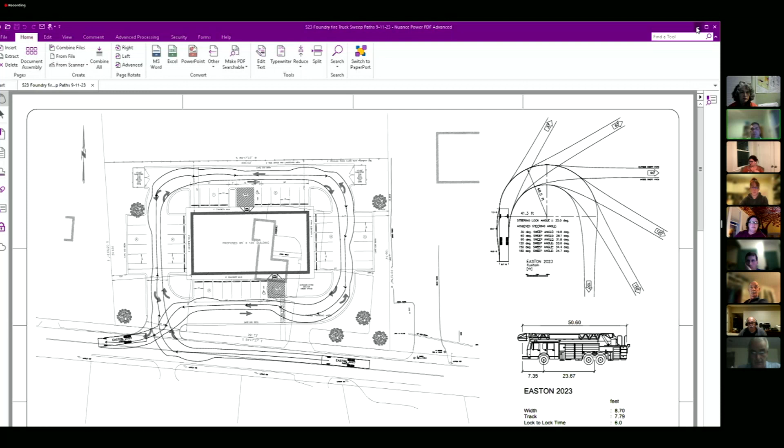Yes, let me... you want me to put... can you see that screen? Yes, you can. Okay, so I highlighted where the structures are for the stormwater, just so you get an idea of their location. They were there with a dotted line, but I wanted to make sure you could see them easily.

The other thing up front here in these parking spaces is that the ADA requires the handicap spaces be as close to the front door of the building as possible. So that's right up here up front. We may even have to put a second one on the other side.

We also have the fire lane in the front. So if we were to somehow move this building forward and eliminate this area in the front and make it all green space, we would really be eliminating the access to the front for the fire department coming around, and also the handicap spaces. It just didn't seem to work no matter what.

We tried all different methods of trying to accommodate the requests or the suggestions, and we just couldn't get it to work. Yeah, in a way I can understand how maximizing the building space on the smaller lot can limit your options as far as the layout is concerned.

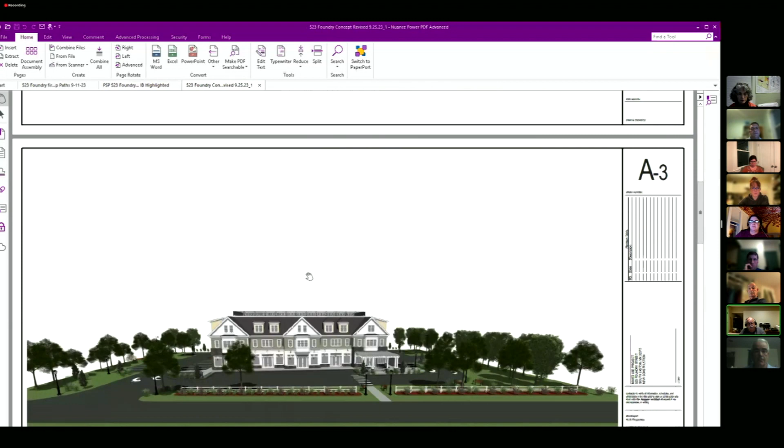I've added bushes in the front, bushes around each island, and bushes in the back on the back corners, instead of having the cement structures there.

We do have a pergola in the front, and we have tables on the other side for people to sit out there. If we were to somehow move this building forward, that would move forward as well, and again, it wouldn't work. So we did try several different ways to accommodate this.

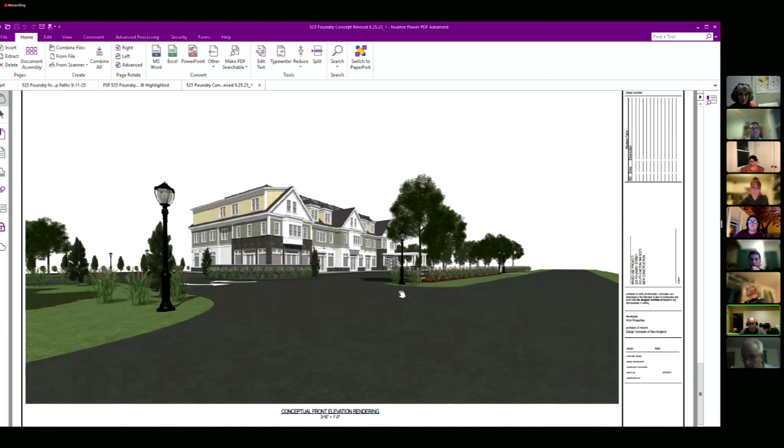And we do have 30% or more of green space, and all the similar projects I looked at in town are all around 20%. I know it's a different district, but I'm trying to show you with these renderings the amount of green space we have there. I think it's quite a bit compared to what other people put in, and I'd be willing to put more bushes in if that made it better.

Are these renderings a somewhat close example of what you're going to suggest for the application? These building renderings are exactly based on the site plan, and these renderings are what I'm looking at for the landscaping. I don't know if the trees out front are the best idea or not.

I'm not sure if it is or isn't, but I know the trees on the side and the other sides are no problem. Maybe those trees do stay out front, I don't know. I don't know what the board's opinion of that is — it kind of blocks the building at the same time.

Maybe if we can just go back a little bit, because we have some new members here, and it's the first public hearing on some of the preliminary information you provided before. Can you give us a quick summary of the actual project itself, as far as the residential and commercial component?

Okay, do you want me to have Walter do that, or— Yeah, sure. Walter Hermano? Are you there? Walter? Okay, maybe not. Okay, so what was the question again? I'll see if I can.

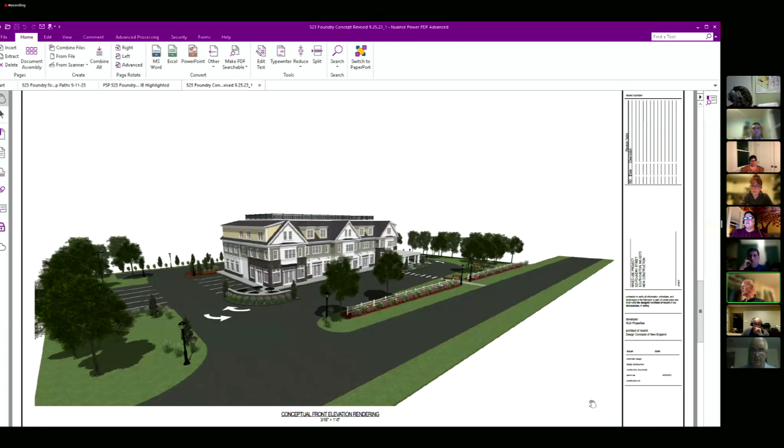It would be a shame to build that nice white fence and then have to move it back because of the sidewalk. Well, if this will be a walkable neighborhood with everything else, and there is a sidewalk there, I would like to see benches and things like that by the sidewalk, so people going to the businesses, especially the bakery, can sit down and have a drink. That changes the way to look at it, but maybe it's too early to figure out. They have a fence there, that's what they have.

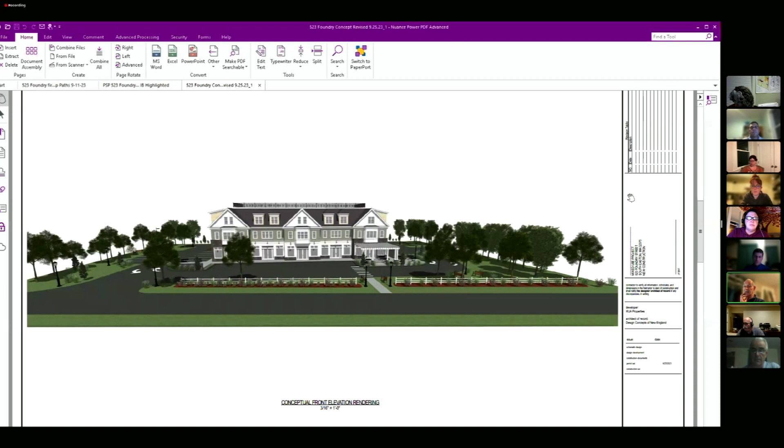Right, and the space between the street - I had a sidewalk on there before and we pulled it off. There was enough room to put a standard sidewalk in there and still have the bushes there and the fence. They don't have to be exactly in that spot, they can be pushed in a couple of feet if needed. There's plenty of room there. I would say take that into consideration when you put the fence - you don't want to start pulling the fence off because they are laying out a sidewalk there.

Given that the 25% plans for the Foundry Street reconstruction are either ready - I think they're done - that should be something we could look into and help you find out. I believe they're still in the pre-25% phase, but I will talk to DPW.

Mr. Adams, excuse me, how many parking spaces are on this plan overall? I believe, let me pull it up. It's in your zoning table? I have it right on the plan. Let me check - so the parking spaces, the required parking spaces are 37 and we have 42.

Okay, how many out front are you planning? I believe there's 8. It says restaurant requires 13, retail 10, multifamily 14, handicap 2 places, total 37. You have 16 for the front, I guess. You count some on the side for them? I have on the sides, I think 12 on each side. Retail says 12, restaurant says 16. I don't know how you count the 16. That's my question.

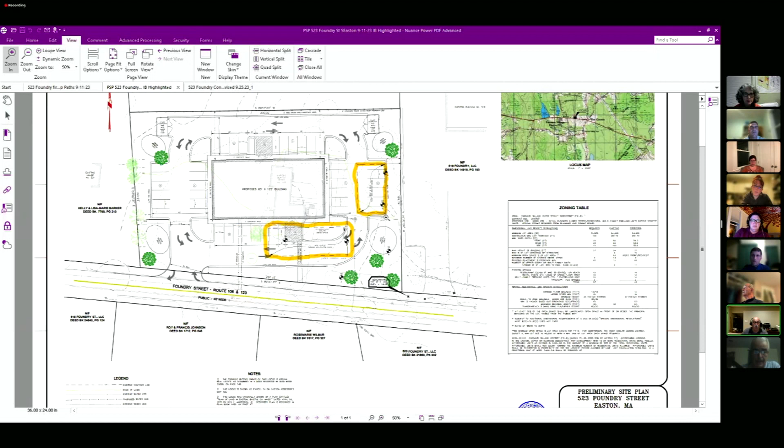It's probably adding on the side 8, 4. Yeah, there's 12 on each side. Let me go back to that zoning chart. Restaurants. So I don't know - Walter, can you hear us? Stephanie, do you see Walter? Walter had indicated in the chat that he's having a problem with his audio. Okay, so I'm also - I don't know where we got the 16 parking spaces.

I count 8 on the front. And I don't know if they include what they call the handicap, so it's probably 7, unless it's a double count. Do you understand? Those numbers don't match. So I don't know if the 8 that's here in the front includes the handicap, right? But in the table, the handicaps are counted separately. Okay, well that should be easy enough to clear up.

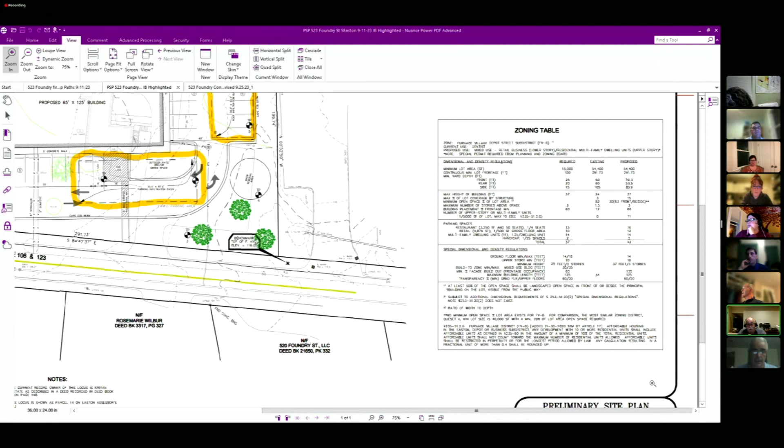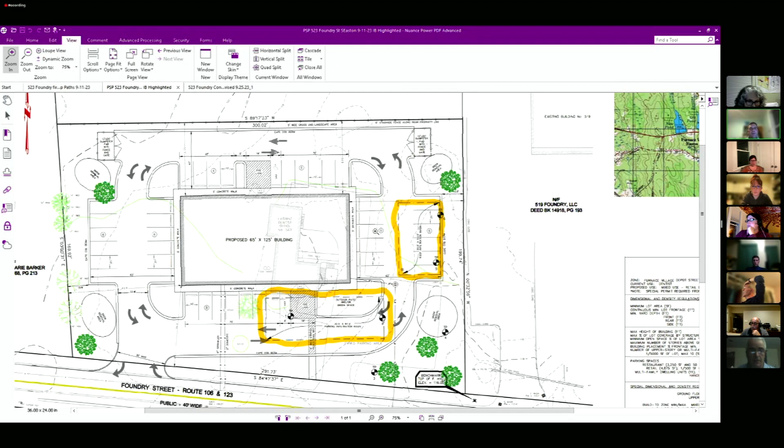Yeah, we can revisit that for sure. Good catch though. So we can count the total, and it comes to 42. I will assume, though I haven't done that, that some of these 8s for the restaurant are on the sides. Yeah, I don't think any of these are earmarked for different uses - it might just be logical that the front ones would be for the commercial, and the side ones would be a mix of residential. They could have some signage trying to direct people to the right spot, but usually when you share parking between uses, it's just a balancing act between the busy hours of both. I think the way you put it on the table is incorrect, although when I count the total on the plan, not the table, it's 42 places. So the total is correct, the way it's represented is wrong.

I'm sorry, Peter, Amos, what is wrong? Because I counted the number of spaces indicated in the circles, and that adds up to 42. Okay, are the circles wrong? No, they're not. You have on your table indicated that there are 42 parking spaces.

That is correct, but if you look at the table, they have descriptions that don't exactly match. They have 8 for the restaurant and some additional ones. Oh right, I see the table is a key, the circle number is saying what those parking spots, those parking areas are for. I see, right.

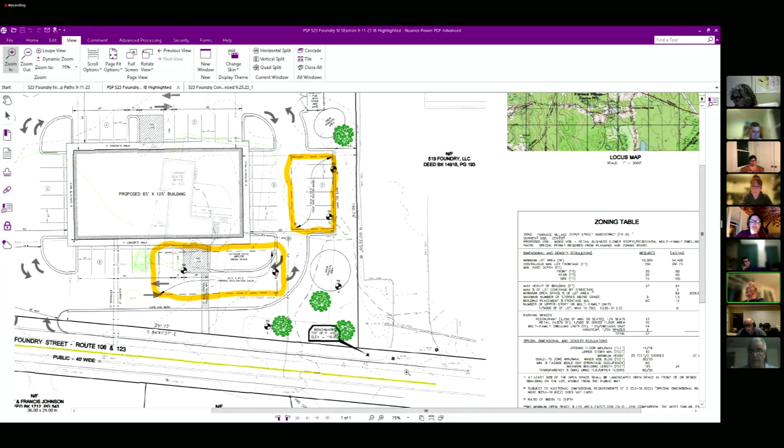I think you should probably just clean that up a little bit, because likely you'll have some, say if the bakery does go in, you might have bakery-only signs so people can pull in and pull out. So it would be good to have that set up right, to make sure it's accurate. Right, I understand, okay.

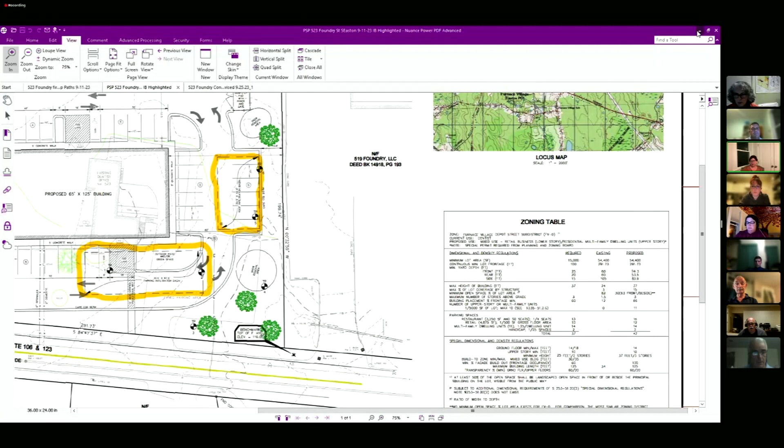Chair, if I may, I have a couple questions. Please go ahead. I'm looking at the Google aerial image of the property, and sometimes these are outdated, so I'm not sure how accurate this is. But on your renderings, it looks like on the west side and south side property lines you're going to thin the vegetation that's there. I'm curious whether you intend to, because there's quite a lot of privacy right now on those two property lines.

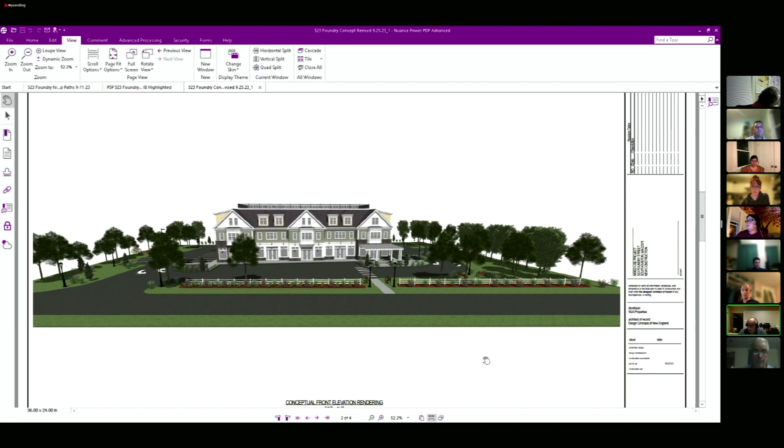So I'm curious whether you're going to keep any of it there, and if not, how you intend to ensure that privacy remains out of respect for the surrounding abutters. Are you talking about the left side and the back of the property? On the left side, I had stated I would leave whatever is there now in existence unless you wanted me to remove it, and I would add some landscaping to create a buffer. On the back side, I have trees along the back, and there's woods directly behind the building that abut the Gaslight Village properties.

I don't know, I could put a fence back there, I don't know if it's necessary yet. I would rather put more bushes and arborvitaes all the way across to put a complete block of landscaping, filling it up with landscaping if possible. So what you could actually do is mark on the plan where you're going to leave the existing vegetation intact, and where you have new proposed landscaping.

Okay, Peter, can I jump in for a second? Yes, please. At this stage, when Mr. Adams originally submitted his application, he wanted the planning board's okay on the site plan before he proceeded with complete engineering and design of the site. So he still has a lot of work to do on the site plan and defining the buffers and everything.

The planning board administrative rules and regulations require either a fencing buffer or a dense 15-foot buffer around the perimeter of the property. So those are all things that should be addressed if the planning board decides this is an acceptable plan and layout for Mr. Adams to proceed with. And signage, presumably Stephanie is part of that process as well. That would be indicated and reviewed.

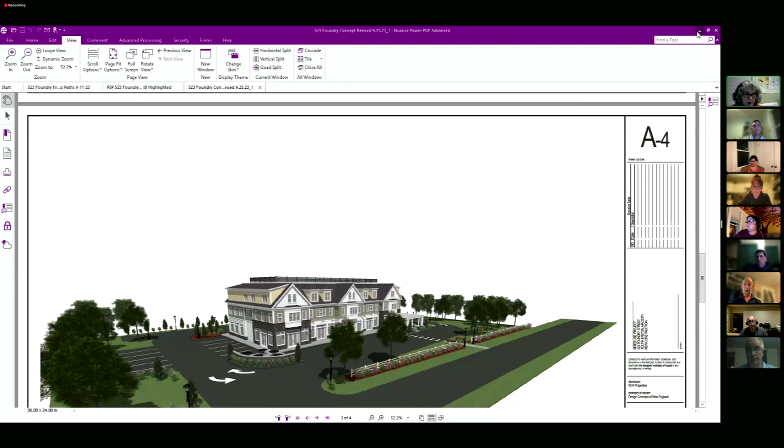So I think one of the other points that Walter made was that you may be able to recover some of your parking. You could potentially space it here, and I really like their idea of outdoor seating and the pergola, but maybe they could shift that in a little bit differently.

And actually, if we move the building a little bit too, that would kind of isolate the residential parking, right? Because you'd say, okay, well this is sort of the residential side, and then this easily accessible larger area is more of the commercial side.

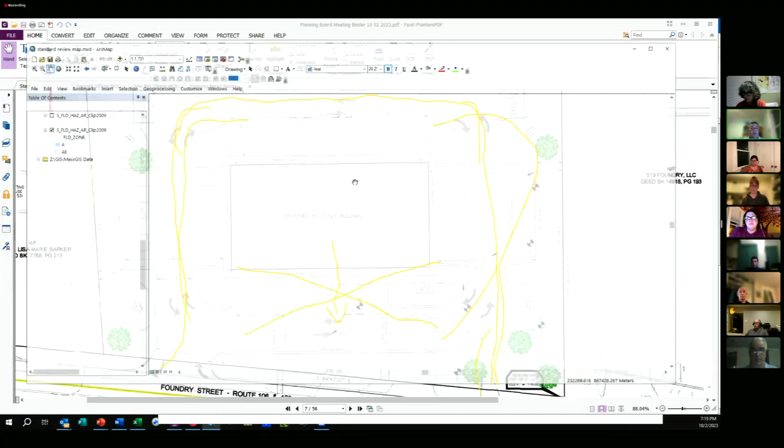I think, if I may, I think the applicant -- if we could pull that picture up again, I don't know who was sharing that. You want me to pull it up? Stephanie, yeah, I think that was your share. Which one are you talking about, Joanne? The one we were just looking at that disappeared. Okay, sorry about that. I was trying to. That's okay.

Let's see, while you pull it up -- I think the applicant makes a really good point, and I think there's pros and cons to either approach. The con in the plan that I see, which is why I was going to ask about signage, is that often when businesses are set back from the road, people don't know what those businesses are as they drive by. Signage becomes particularly important in businesses set back from the road. If you have them closer to the road, you have less need for signage, and it's more obvious to people as they drive or walk by that the businesses are there.

What I'm wondering is if maybe there's a compromise, and I don't know how feasible this is, but if we leave the plan as it is now, where the building is, and use that left entrance as both the entryway and exit way, but once you hit the bottom right corner, that's a roundabout there -- you can't go all the way around, only to that point where the cursor is, and then you'd have to turn around to go back out the other way. That would mean you could use the existing right lot and the back lot for residential use, and presumably the main entryway into the residential portion of the building could be on either one of those sides. I'm not sure exactly where it is right now. Then you could use the left parking lot as it is for your businesses and make the business entry in the bottom left corner of the building.

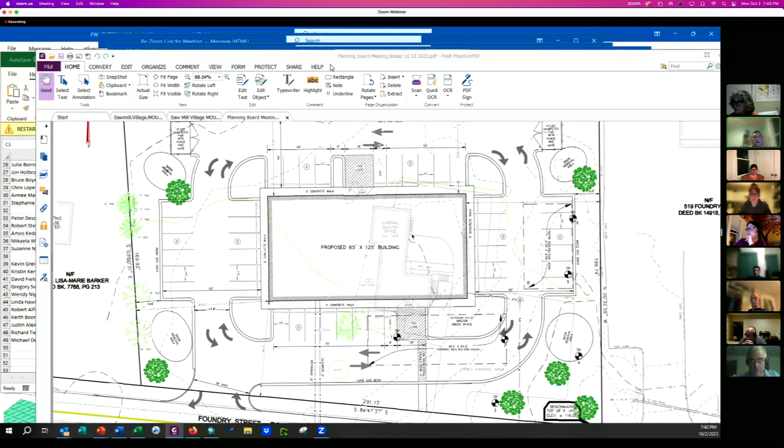All right, well, based on some of those comments and different opinions with the board here, I think we could consider going forward with the site layout as is, and then just really do quite a bit of work on the landscaping, the buffer, the outside areas for both the commercial and residential components, and give it back eventually to the architecture, and make this a good development. What does anyone else think, as far as board members?

Bob has expressed that he'd much rather have the building moved up. Amos had a little bit differing opinion there, and then the other board members had a few ideas that could work if we move the building up. But I'm not super opposed to what has been presented.

Mr. Chair, that's probably my opinion. It would be great if it can be reduced, the amount of asphalt, and bring it forward and put it closer. But the amount that you can bring it up, the amount of improvement is not -- it doesn't justify for me to oppose this plan.

Yeah, we might be able to spend a little more time, and the applicant too, some more thought on what green space is proposed on the existing plan, and it can just kind of work from there, and make sure everything's safe and a good fit for the neighborhood and the business.

I would like to just say to the applicant, a walkable and friendly, human-sized neighborhood is something that we are looking for. So there are things that can be done to this building on the detail of your design, on the side where the bakery or someone else, there are places to sit down that invite the public to come in, maybe benches on the front, on the area where you have the landscape.

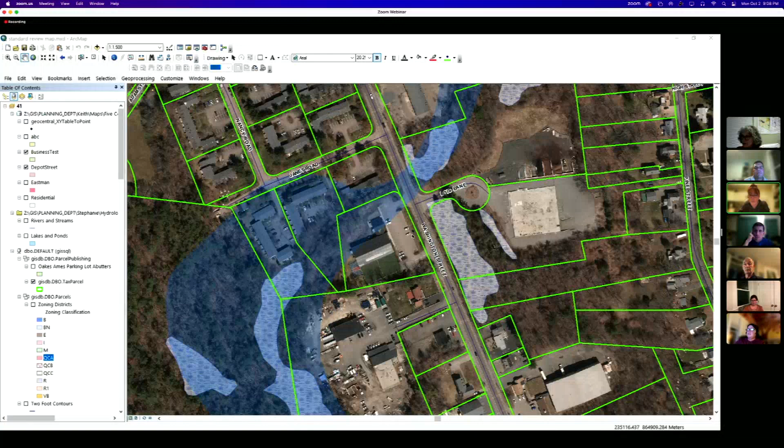I'm with Mickey on that. I'm not opposed to the concept. The concept is fine, but we just don't have enough information to determine any more than that. Yep, sounds pretty good to me.

What information are we asking to provide? The hours of operation, how many dogs are on site overnight, the play area where they would be toileting, screening, parking, and barking mitigation, waste practices, things like that - the usual kennel things. Just like things we would ask when we have the site plan review. We just don't have that information in what has been submitted up to now for the ZBA.

Well, in that case, it would be some type of no comment. I don't want to just say no comment. We can say no comment because additional information might be required. Mickey, I think you worded it better - could we just say no comment based on information provided? Just because there's not enough, I'm not sure how to word it. No, I think that's sort of what we usually say. Is that a motion?

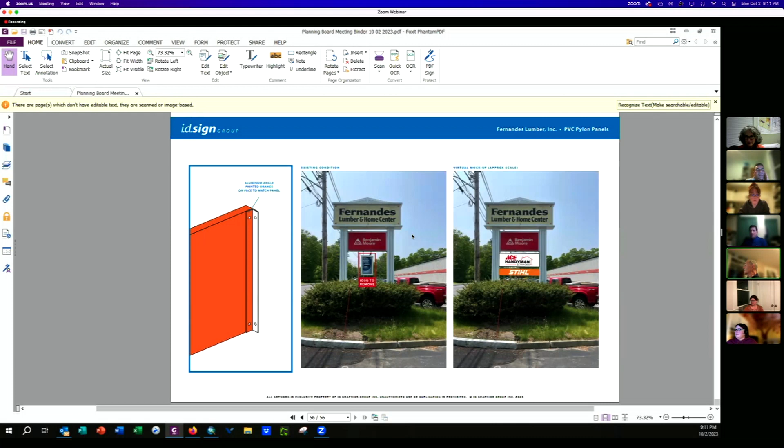Yeah, I don't see anything. I'm fine with it. Fine, recommend. I'll make a motion to approve. Motion to recommend, Wolf.

Kadam second. Okay, all in favor? Kid, aye. Stetson, aye. Tatum, aye. Zigman, aye. Wolf, aye. Deshane, aye.

Can I ask, the one where the gentleman dropped off, do we just continue that one? He never came back. I was going to check in and I don't think he's coming. I mean, I thought that's what the board basically said - if he didn't come back, I'll let him know what the questions of the board are that he needs to sort of address. It was informal in the first place, so we don't really have to continue. Good question.

So anything else? Any minutes to vote on? Minutes are good for me. That's a motion there from Amos, seconded by Wolf.

All in favor? Kadam, aye. Stetson, aye. Wolf, aye. Kid, aye. Zigman, aye. And Deshane, aye.

I tried to move around and I kind of lost track of where I was on that one, so that's what I paused and left.